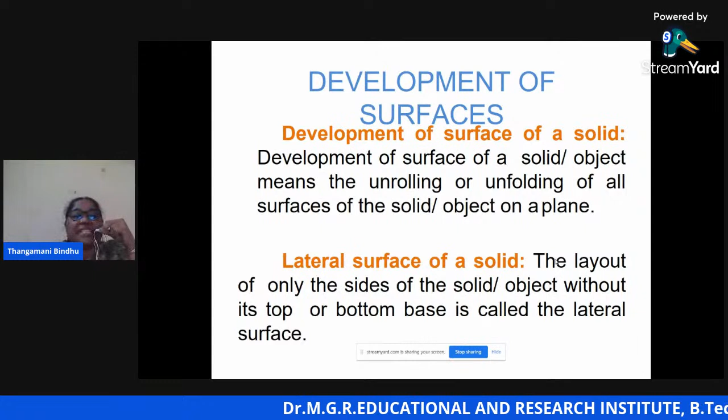So development of lateral surfaces of a solid, the definition: it means the unrolling or unfolding of all surfaces of the solid object on a plane. So here the reference planes we take are the horizontal plane and vertical plane. The object will be in space; it should be brought to the paper. Only if it is brought to the paper will we understand the dimensions. It is very, very important to understand the size dimensions.

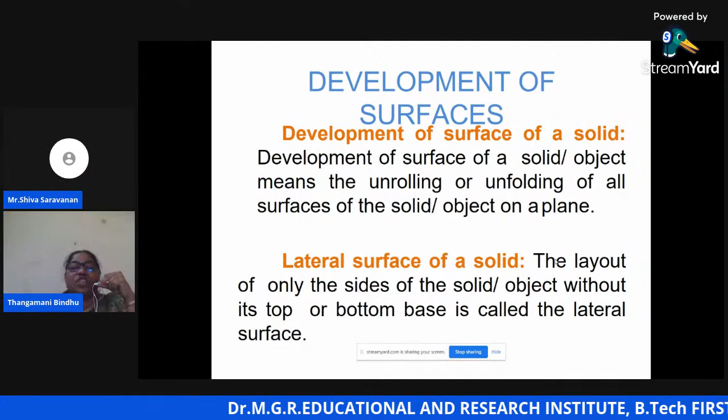So what is lateral surface of a solid? The definition is the layout of only the sides of the solid, that is rectangular or triangular sides of the solid or object, without its top or bottom face, is called the lateral surface.

Now sir, next slide ma'am.

Yes, the engineering applications. Metal sheet work. Actually you might have studied this in workshop. You might have seen the example of making a tray, that is sheet metal work. In sheet metal work, development of surfaces plays a vital role, enabling a mechanic to cut the proper size of the sheet. No wastage is allowed. So cut the plate from the development and then fold at proper places to form the required object.

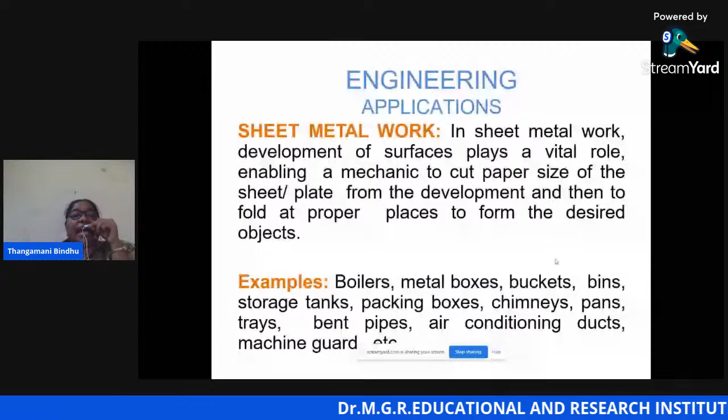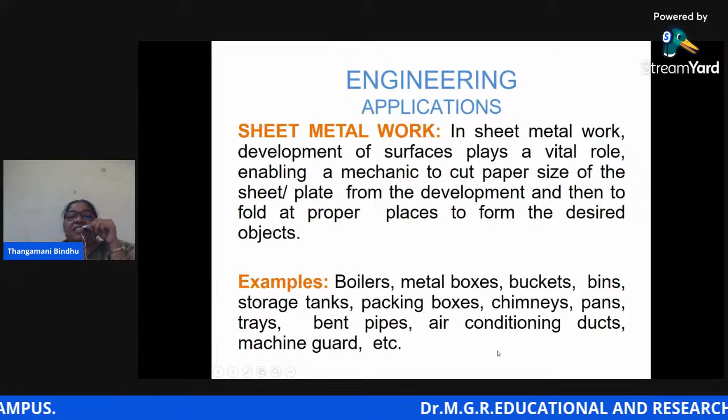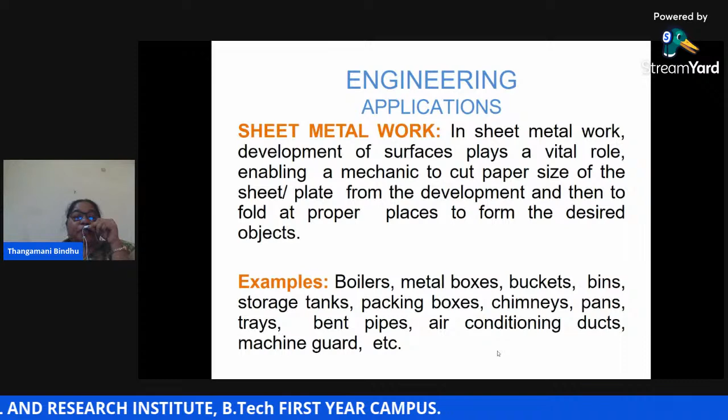So here it's very, very important to take into consideration the loss of material waste, which in turn leads to the loss of money. So it's very important to understand the shape. Next, the examples where it is really used: boilers, metal boxes, buckets, bins, packing boxes, chimneys, pans, tray. If you have a good knowledge about development of surfaces, packing boxes will be a perfect box. Next slide ma'am.

What are the various methods we follow for the development of lateral surfaces of solids? There are four methods, but in our syllabus we follow two main methods. The first method which we follow for development of lateral surfaces of solids is the parallel line method. I'll tell you what the parallel line method is.

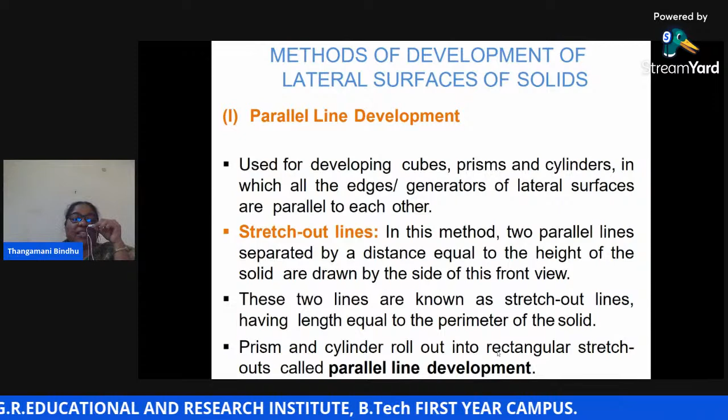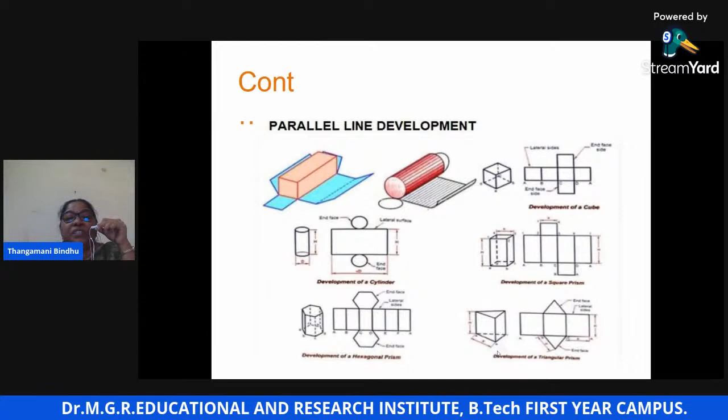Development of a triangular prism, that is on the right side. Left side, you can see the development of a cylinder, just a rectangle with generators inside. Below that, it is the development of a hexagonal prism. Only the top and bottom base will give you the true shape. See here, totally 6 rectangular faces and 2 true shapes, top base and bottom base. So this is an example for various cubes, prisms, and cylinder. Next slide, ma'am.

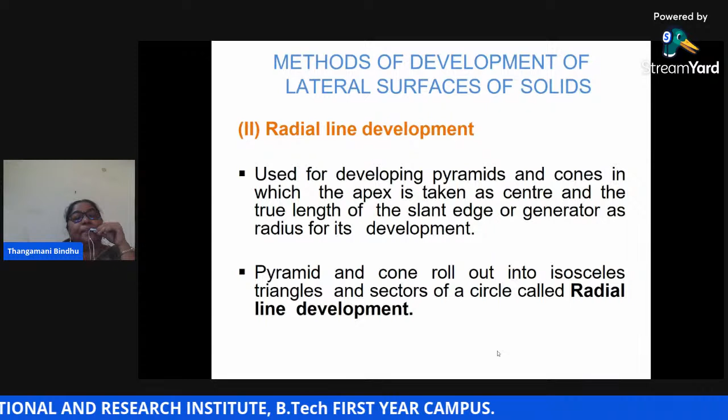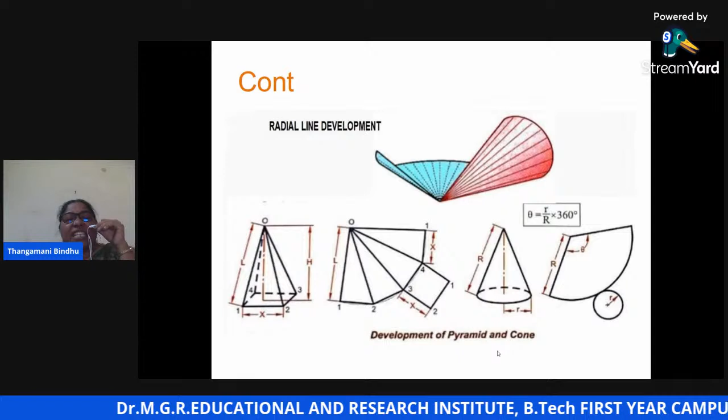Here you can see the diagrammatic view of the development of a pyramid and a cone. Left side is the development of a square pyramid, right side is the development of a cone. On the left, if you develop the pyramid, it has triangular faces, apex at the top, base at the bottom. In between, we call them faces, lateral surfaces. Development of lateral surfaces. On the right, if you develop a cone, it is just a simple sector with the bottom base. Next slide, ma'am.

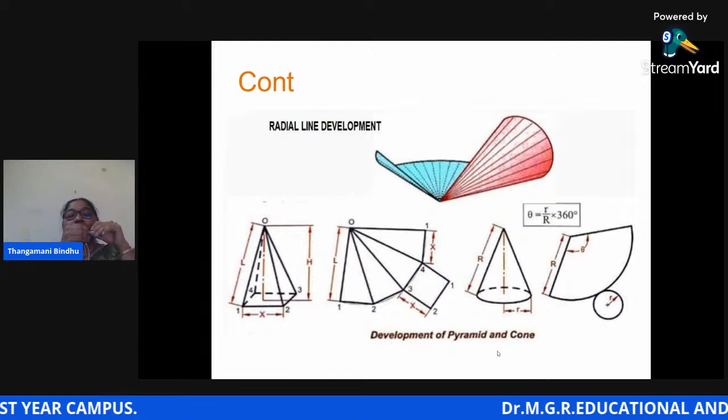So first, the definition is over. Second, why we should have knowledge about development of surfaces. Third is applications. Then fourth is the methods, radial line method and parallel line method. Now some example problems I'm going to tell you stepwise.

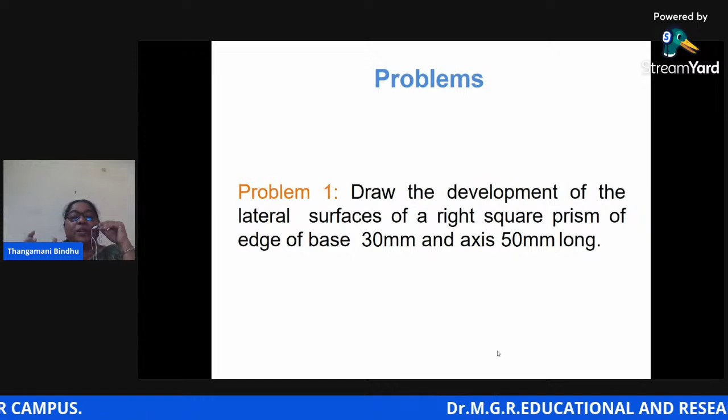Draw the development of the lateral surfaces of a right square prism. Sometimes we use the word right or regular. The meaning is it is placed without any inclination, resting on HP, that is the horizontal plane, without any inclination. That is why we say right square prism, of edge of base 30 mm and axis length 50 mm. Okay, next slide, ma'am.

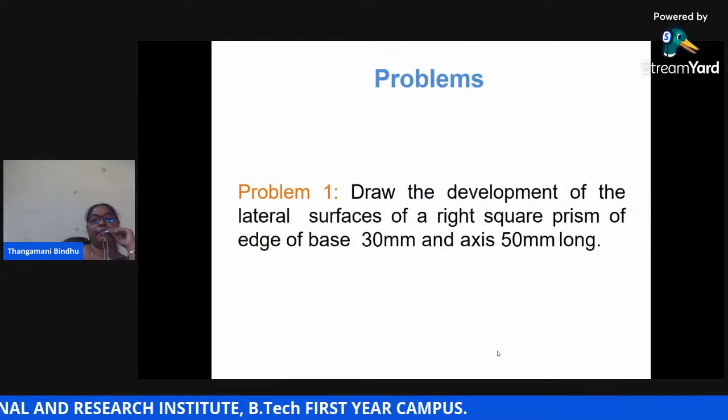Yes, in the exam, this is the way you have to present this. You have to draw. Okay, development of a square prism. Step number 1, I'm telling you stepwise. Step number 1, left hand side, you have to draw the projection of the solid first.

That is, the square prism is resting on HP. If it is resting on HP, here we follow first angle projection: top view in the horizontal plane, front view in the vertical plane. So when the square prism is resting on HP, the true shape top view will be in the HP, and the rectangular faces, the lateral surface we are going to develop, will be captured in the vertical plane. So step number 1, it is compulsory for you to draw the projection of solids.

So given side is 30. First draw a 30 by 30 square top view and give namings A, B, C, D to the corners. You have to show the dimension line and write the dimension 30. Don't write mm there. At last, you can write all dimensions are in mm. So complete the top view first.

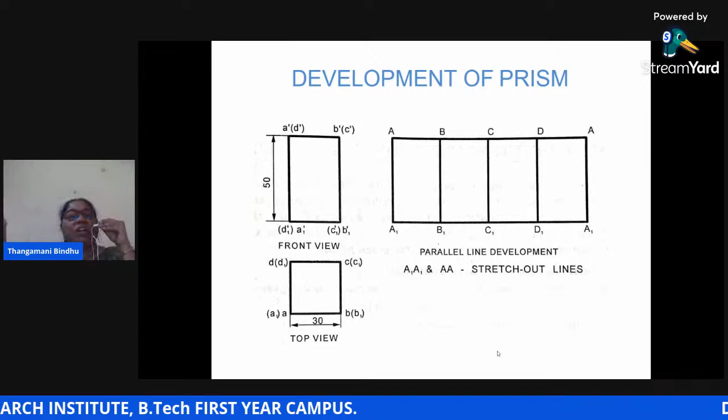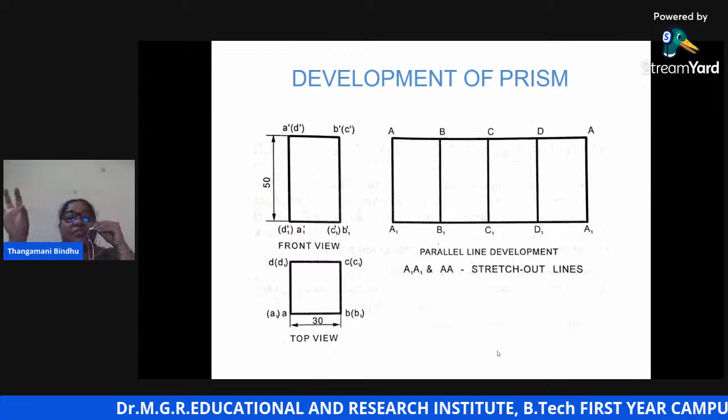Draw the perpendicular line upwards up to the stretch out line and give namings A, B, C, D, A. So you will get 4 lateral surfaces, rectangular faces. For pentagon, 5; for hexagon, 6. And you have to darken the lines. Stretch out line should be light, but the lateral surfaces should be dark. So this is the parallel line method, the procedure you follow for the square prism. Next slide, ma'am.

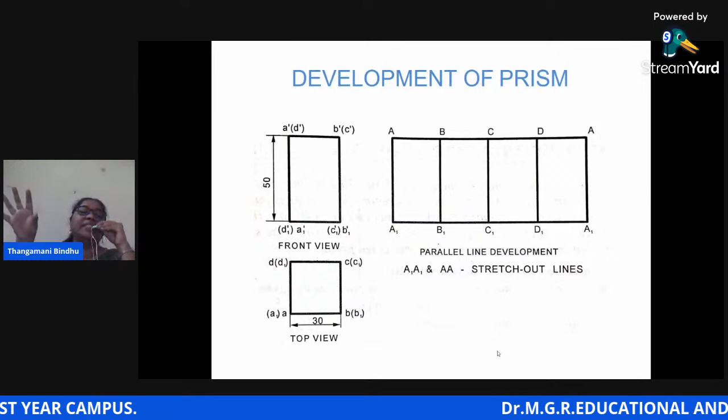Second, draw the development of the complete surface of a GI cylindrical drum with lid. GI means galvanized iron. Lid means the top base. Diameter is 30 centimeter and the height is 1.6 times the diameter. Take suitable scale. So for industrial purposes, the question will be like this. It won't be a direct question, only indirect.

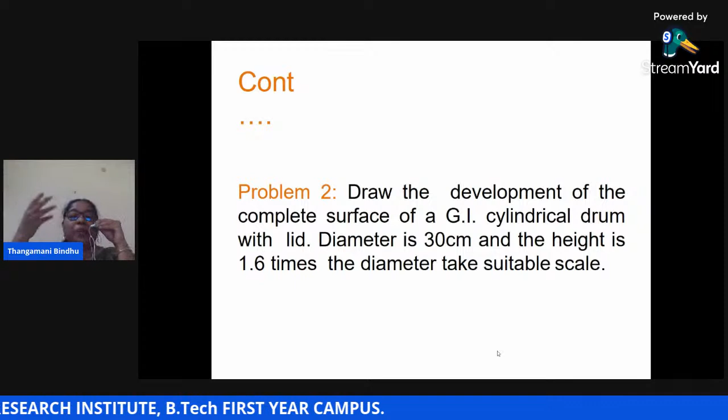The diameter is 30, and the height won't be given as 50 or 60 directly. It will be 1.5 times or 1.6 times. So this is an example of how the industrial question will be given. You have to take suitable scale and draw it. Next slide, ma'am.

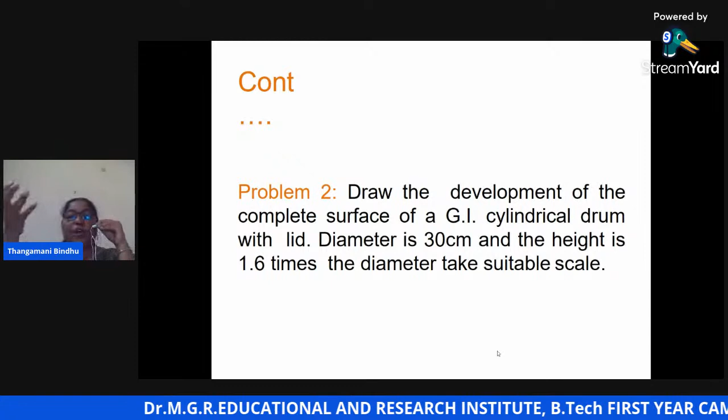Yeah, this is a development of surfaces of a cylinder. Before starting, you have to calculate the circumference, that is the perimeter. What is the perimeter required? So here in development of a cylinder you have to follow a formula. It's nothing but what you might have studied in school.

So what is the circumference perimeter? That is length L is equal to pi d, where d is the diameter of the cylinder. So calculate that, that is the length AA. That is a stretch out, that is the lateral surfaces. So step 1, calculate the length. Length of the development L is equal to pi d, where d is the diameter of the given cylinder.

Step 1. Step 2, I told you it is important to draw the projection of solids, then you have to stretch out. So draw the projection of solids, that is the cylinder top view and the cylinder front view. Since it's a cylinder, the true shape is a circle, or diameter is given. Take the radius, draw the circle, project it upwards, draw the front view.

Here you have to calculate the front view height. Axis height is not given. So 30 into 1.6 times, it is coming as 48 centimeter. So axis height also you have to calculate. In engineering, in industries, you have to calculate and you have to do it. You have to apply yourself, apply your knowledge. So 1.6 times the diameter, it's coming as 48 centimeter.

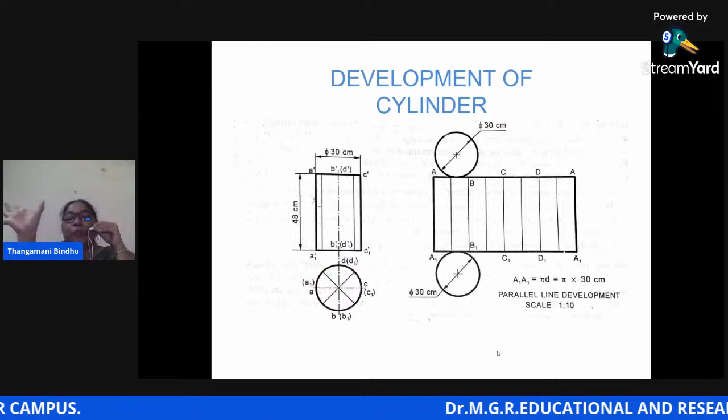Second, draw a straight line from the top base, draw a straight line from the bottom base. Just stretch out parallel lines. Leave some space, locate a point. Here you just take directly L is equal to pi d. No need to divide it. So complete the rectangle first. Take L is equal to pi d, the value directly, that is AA1. Complete the rectangle.

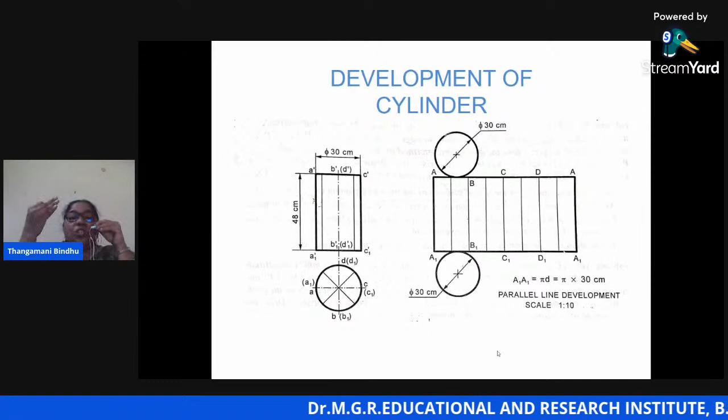Then what are the inside lines? They are generators. If you want, you can divide the given rectangle into equal parts and show the generators. Otherwise, just a rectangle is sufficient for the development of a cylinder. Then there is a lid for this particular drum. So draw the top base and bottom base. It's a circle. You can choose any generator point, not the corner, and draw the top base and bottom base with the given diameter. So this is the procedure for the development of a cylinder.

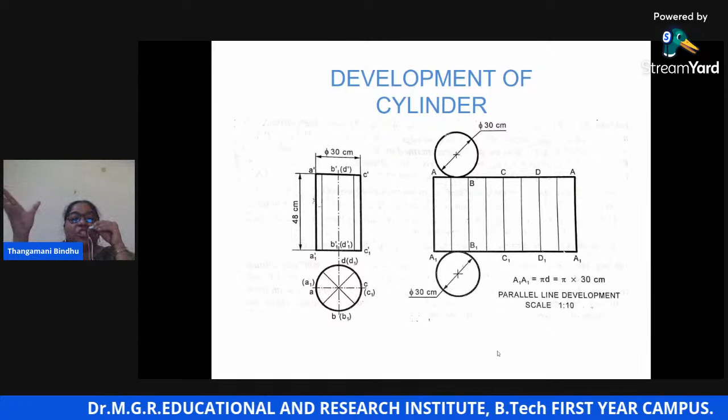Yes, third problem. Now we are coming out of parallel line development. We are entering into radial line development. So draw the development of the lateral surfaces of a square pyramid, side of base 25 mm, height 50 mm, resting with its base on HP, that is horizontal plane, and the edge of the base parallel to VP.

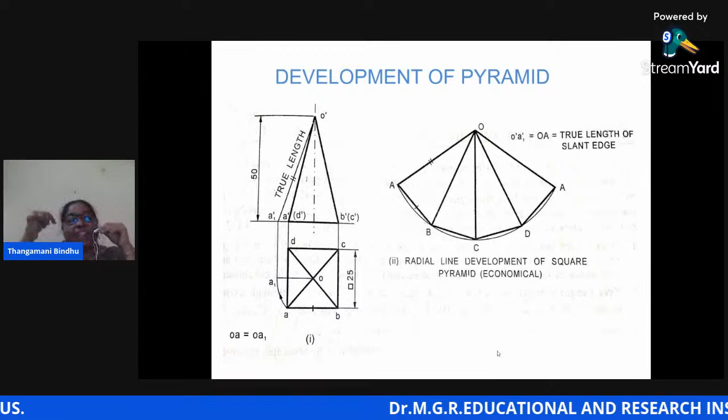Now, all the A, B, C, D, A join with the apex O, capital O. I'm talking about the development. Okay. So join OA, OB, OC, OD, OA. Now it's not going to end because for a square pyramid, for all the pyramids, the edges are straight lines. It's sharp edges. So we have to join not only OA, we have to join AB, BC, CD and DA straight lines for completing the drawing. And all should be thick lines, not thin lines.

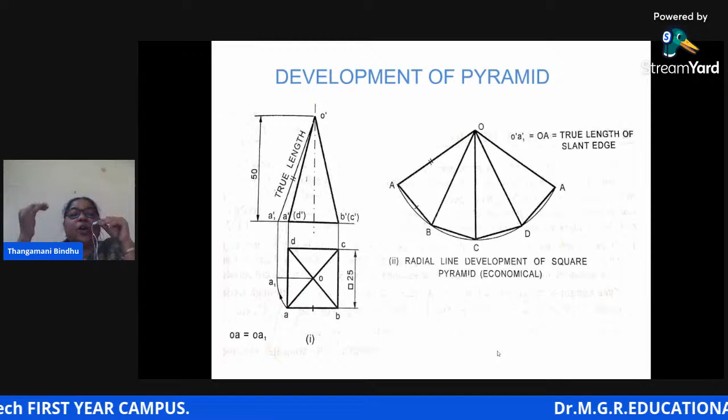No need of any procedure to be followed because the generator is parallel to the XY line, so no need to follow any new procedures. You can directly measure the slant height, which can be taken as the true length.

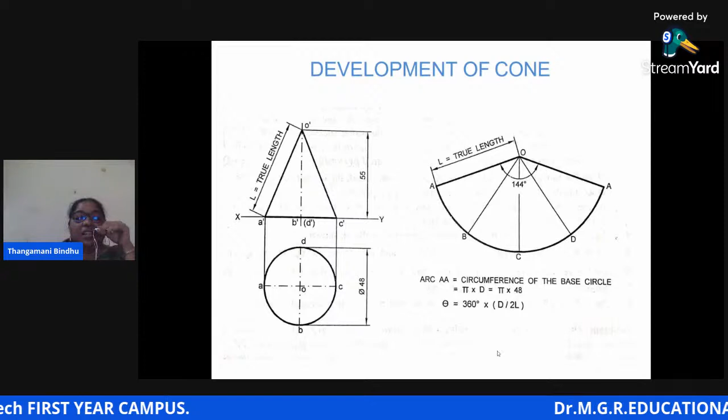So here no need to join A-B, B-C, C-D, because for the cone, if you open the base, it is a circle. So no need to show any straight lines. It's just a circle. The inside thin lines are generators - no need to show them, but if you want to show some generators, you can divide it into equal parts and show them. But the development for a cone is just a sector.

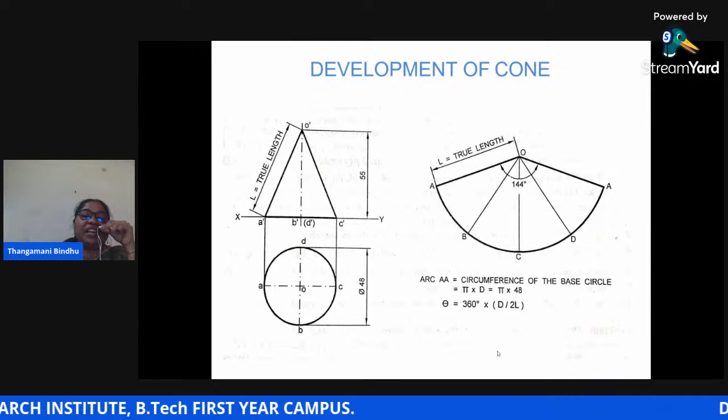So three things you have to remember: calculation of theta, the formula, and that it's just a sector - no need to join the base edges. This is the development of cone using the radial line method.